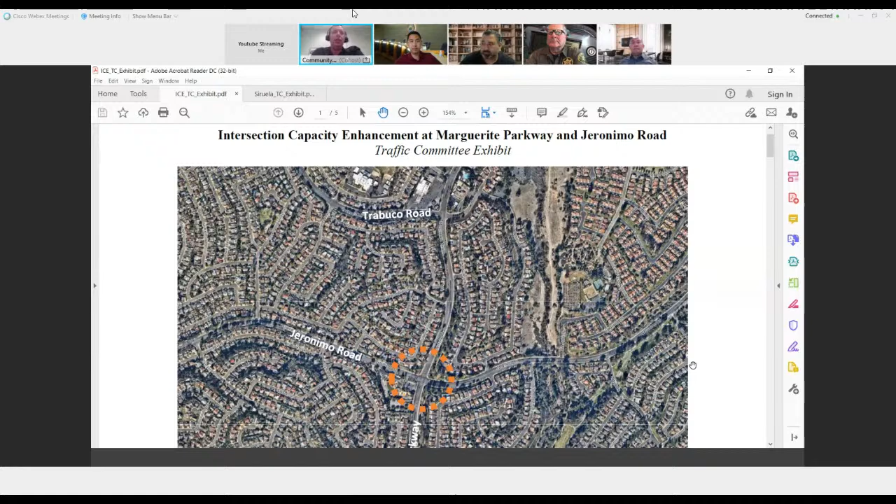And this is going to allow us to add some additional lanes here to handle the traffic flow at this location. So real quick, let's just go over the summary of the changes that are going to be made at this intersection.

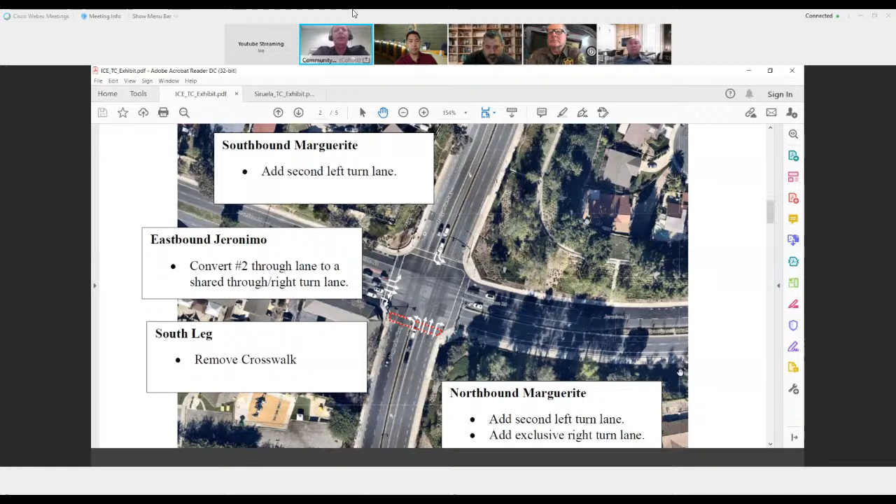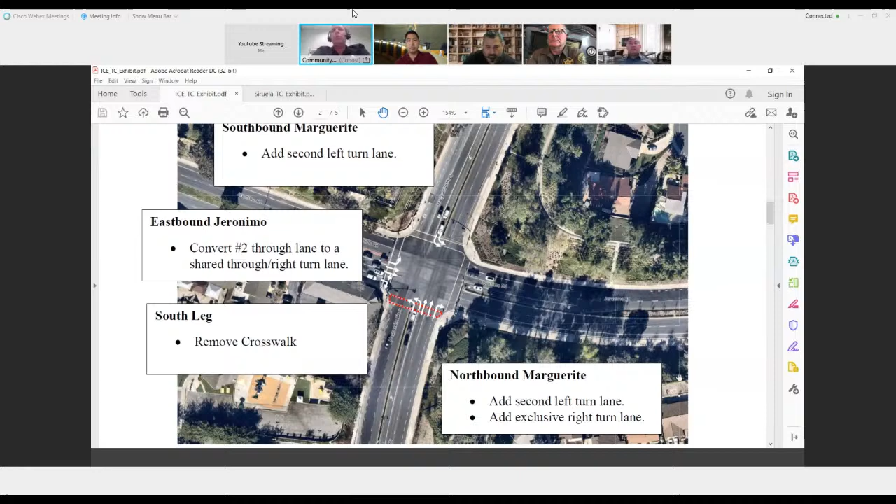So on the southbound direction, we will be adding a second left turn lane. In the eastbound direction, we will be converting the number 2 through lane to a shared through and right turn lane. On the south leg of the intersection, you'll see in the red dotted area, we are proposing to remove the crosswalk on that leg of the intersection. And then finally on northbound Marguerite, we're going to be adding a second left turn lane and an exclusive right turn lane.

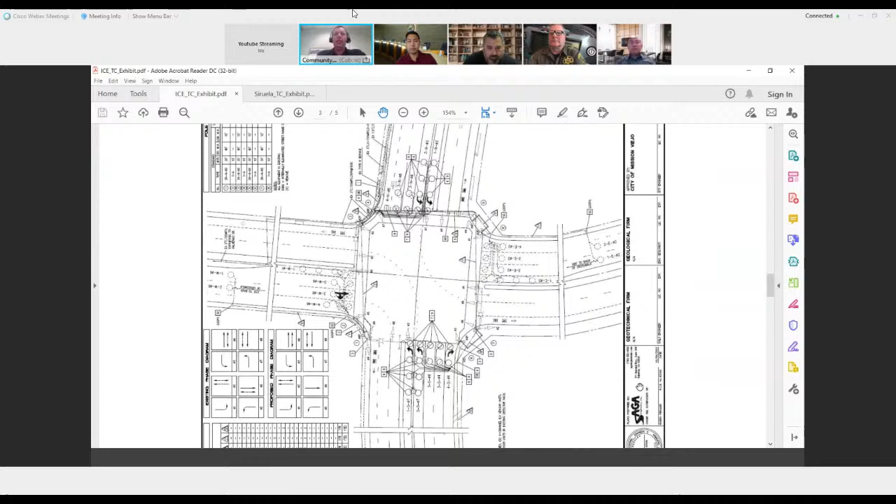So that's the scope of the work that's going to be completed out there. And the next exhibit we have shows what the proposed project will look like when it's constructed. So you can see on the northbound and southbound sides, the second left turn lanes there. And on the left side, which would be the western side of the intersection, you can see the new roadway stencils for that shared through and right turn lane in that what used to be the number 2 through lane there. And then at the bottom of the intersection, you can see that the crosswalk has been removed.

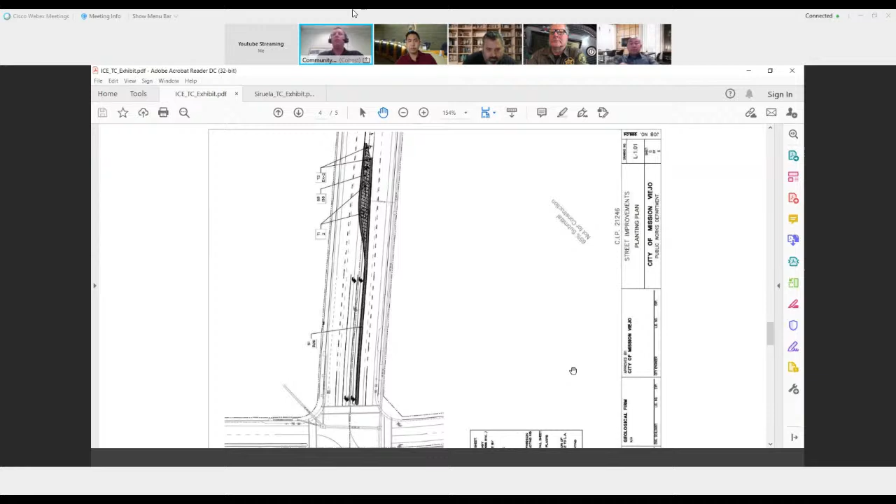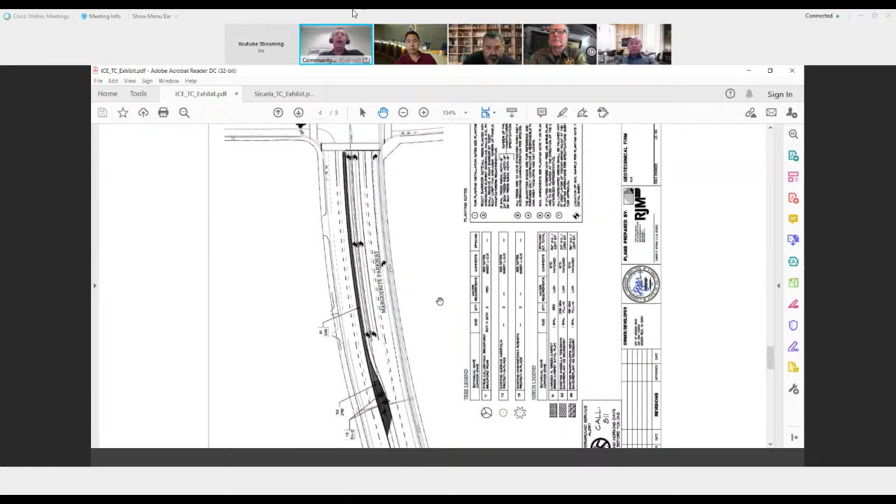And then this next exhibit shows you the plans of how we accomplish this. We're not making any changes to the footprint of the right-of-way, but these changes will be accomplished by making modifications to the center median and shifting some stuff around to make room for those extra lanes. So there's the northern leg of the intersection and the modifications that are going to happen to the median there. And then it will be doing a similar thing on the south side where you can see the modifications to the median that have to be made so that we can add the additional left turn and the exclusive right turn lane.

Now, the reason we're doing this, I have an exhibit here to show what the justification is for making these changes. And so here the arrows are a little bit tiny, but we'll go through them in the table below, showing the existing traffic volumes at this location to justify why we're adding the second left turn lanes or the exclusive right. So we can review those numbers now.

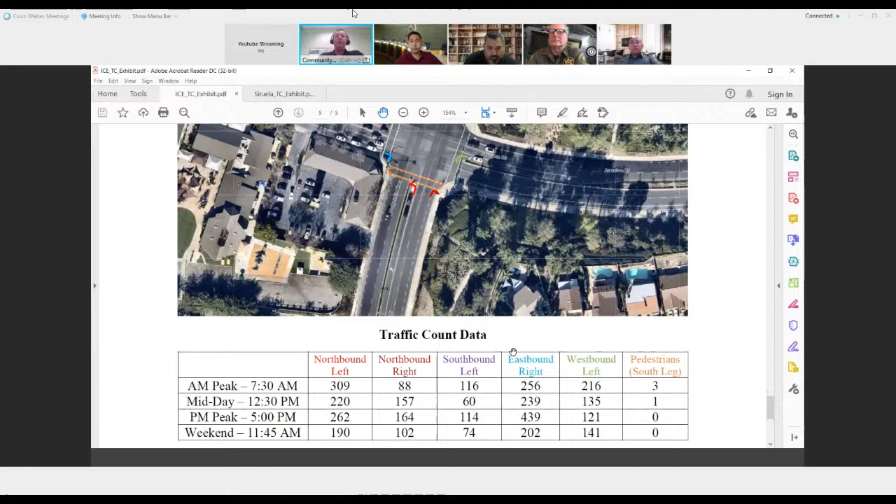So starting with the northbound direction, we have our 4 different peak periods we look at: the AM peak, the midday peak, the PM peak, and then there's the weekend that we have to consider. And these are basically tied to this traffic signal coordination patterns that we have running out there. So those would match up with these timeframes, and the patterns would be adjusted to best service these traffic volumes.

So the northbound left turn, we have traffic volumes that range from 190 vehicles per hour up to 309. A typical left turn lane like this would handle about 250 vehicles per hour. So on the weekends it's functioning adequately, but the midday peak is getting really close, and the AM peak and PM peak it's operating above capacity. So that's the justification for the extra northbound left turn lane.

The northbound right also gets some fairly heavy traffic, mostly in the midday and PM peak periods, where it's 150 to over 160 vehicles per hour.

So the southbound left turn lane isn't quite as impacted as the northbound direction. Our peak hour traffic volumes there range from 60 to 116 vehicles per hour. But I believe the extra southbound left turn lane is included because of the offset we have to make for the medians changing to make room for the northbound left turn lanes. We could either have a second southbound left turn lane or just a shaded-out gap between the turn lane and the through lanes, and we figured if we're going to do that, we might as well have the second southbound left turn lane.

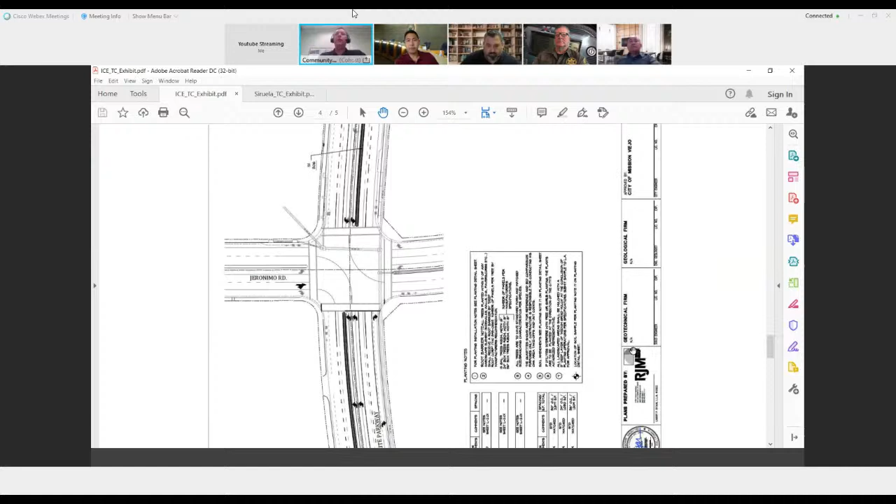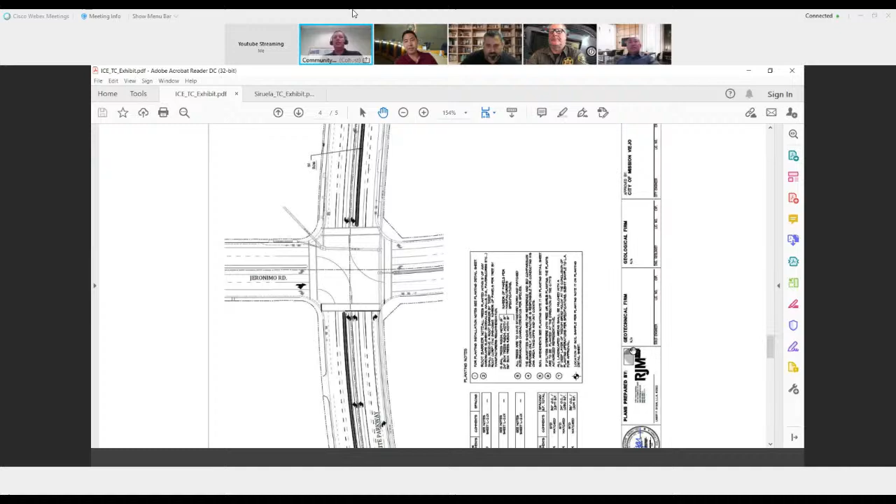So our role here is just to review this information, and then it'll be passed along to the city council, correct? That is correct. And when we do the process with city council, there are signs that get posted at the intersection for that crosswalk, and that will give the opportunity to take public comment on the removal. I see, okay, so we don't have to make any decisions that would prevent this from going forward to the city council. I mean, not that I plan to, but I just wanted to clarify our role. Yeah, the role of the traffic committee is to say that you reviewed the traffic volumes in the chart here at the bottom, which shows a low volume of pedestrians on that crossing, and so you would be moving it forward to city council for them to take their review.

Okay, while we've got it in front of us, what is the estimated time for completing this if it's approved by the city council?

That's a good question. The project is managed out of our engineering department. Our assistant engineer, Joe Ames, will manage the construction. But we have to go through this step before he can even begin construction. The process requires design first, which we're wrapping up—we're at the final stages of design. Then we have to go out to bid, and the winning contractor will start on the project immediately thereafter. I'd say it would start before the end of this calendar year, and probably take six to twelve months to complete.

So from today, maybe we're looking at a year, maybe next summer, by that time it'll be fully completed. But as far as starting the actual construction in the intersection and completing that, we don't know yet an estimate until it goes to bid. Correct. We have to first hire a contractor, and once we award the construction contract, we can meet with them. Depending on their availability, they will start the construction portion of the project.

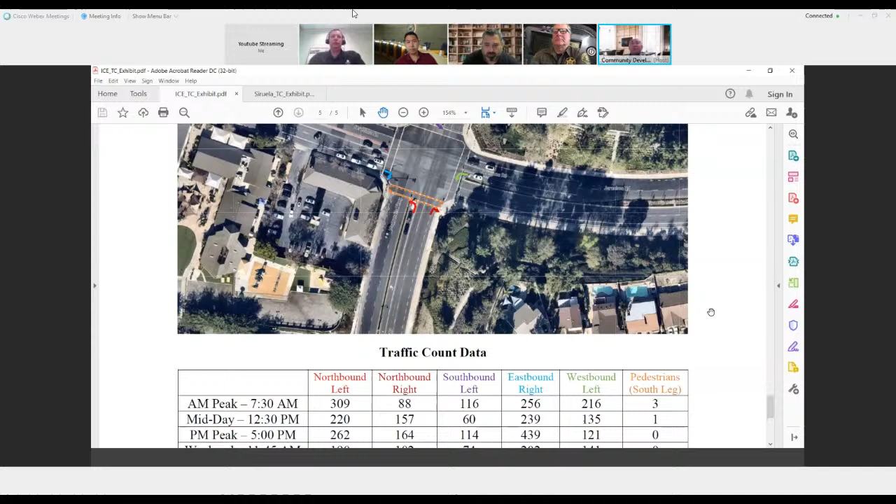But when we did the pedestrian volume count, you can see on this table in the far right column—fairly, there were only three people in the morning, one at noon, and then nobody in the afternoon and nobody on the weekend. So we're inconveniencing about four pedestrians crossing here. One corner does have commercial retail, so that's an attractive corner, but they have a parking lot there, so if you're driving to that location, you'd go to that corner. The only challenge is if you're walking or biking to that location and coming from the southerly leg crosswalk. That would be the only challenge, but our data shows it's not utilized very heavily, so we felt comfortable removing it.

Gotcha, okay, thank you very much. You answered my question, appreciate it. Right.

I recall a long time ago this concept of level of service of an intersection. Is that applicable here? And if so, does this improve the level of service of this intersection from what it currently is, which I'm not sure what it is now?

Yes, I'm gonna take this one, Brett. Yes, it helps. It helps a lot. I believe today we were just right at acceptable level of service, which was a level of service C.

This intersection, I don't know if you guys drive by it often, but the northbound left turn lane, the queue is so long that it spills into the through lane. So when you're driving up Marguerite, you see cars stacked in this left turn lane and spilling into your through lane, so you have to either go to the next lane over or stop. That's really what prompted these improvements.

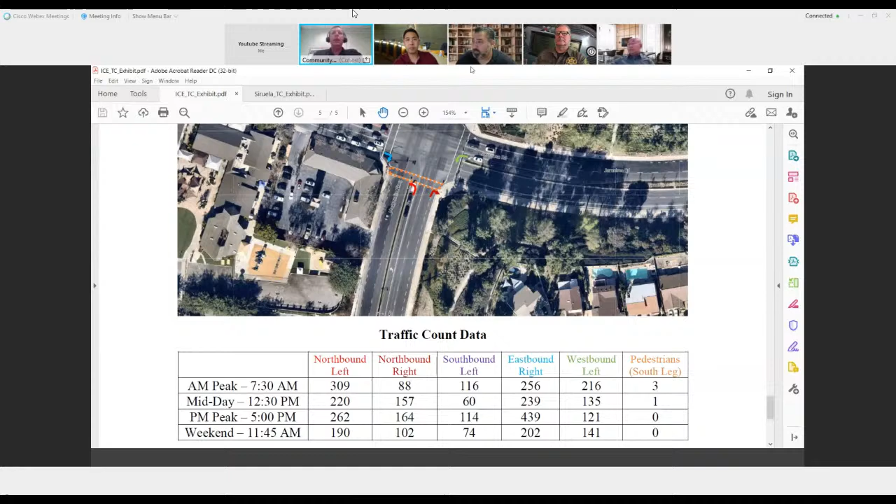All right, that will finish up this item, and so I can stop sharing my screen. That'll move us on to item number 3, which is a request for an accessible parking space at 27286 Jardines. Philip will be providing the staff report for that item.

We are at the property address of 27286 Jardines, in the southern end of town, on the northeast corner of Marguerite and Crown Valley Parkway. If you're heading east on Jeronimo past Marguerite, there's a traffic signal at Jardines. You go into the Jardines tract, almost all the way to the end, near the cul-de-sac. That's where the property address is.

This portion of Jardines has a 25-mile-per-hour speed limit. We don't have any traffic volumes and there are 0 reported collisions. This request was for an on-street accessible parking space directly in front of the resident's home. They would like an accessible parking space constructed on the street in front of their single-family detached home.

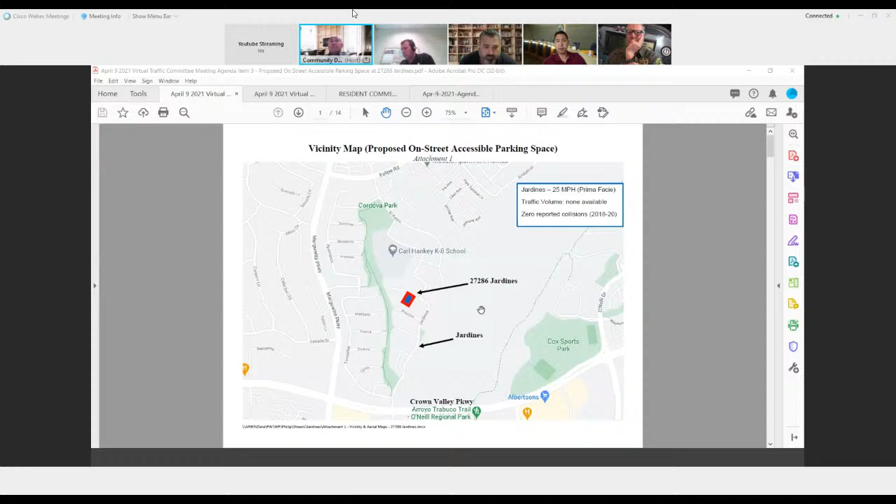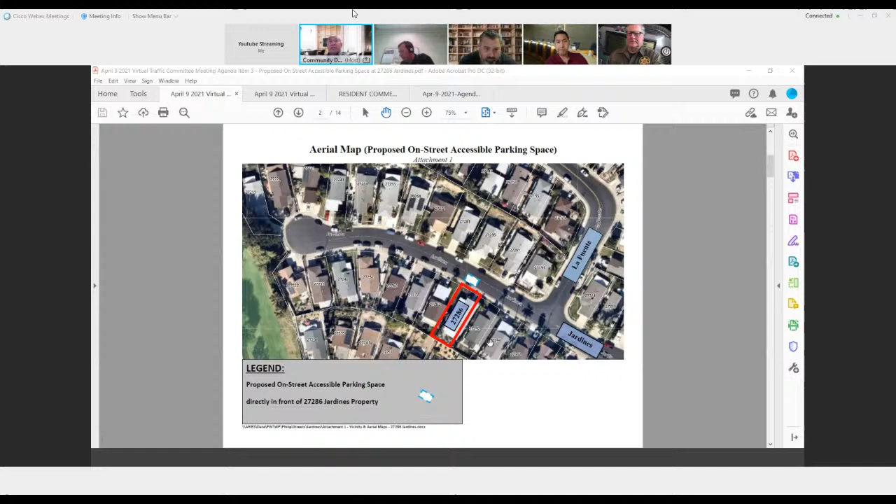I'll read their original request in a couple of exhibits. Here is the aerial view of the cul-de-sac on Jardines. The property address is 27286. There's a proposed on-street accessible parking space, so I put a little white box there with a blue perimeter where it's supposed to go, and I highlighted the house with a red box.

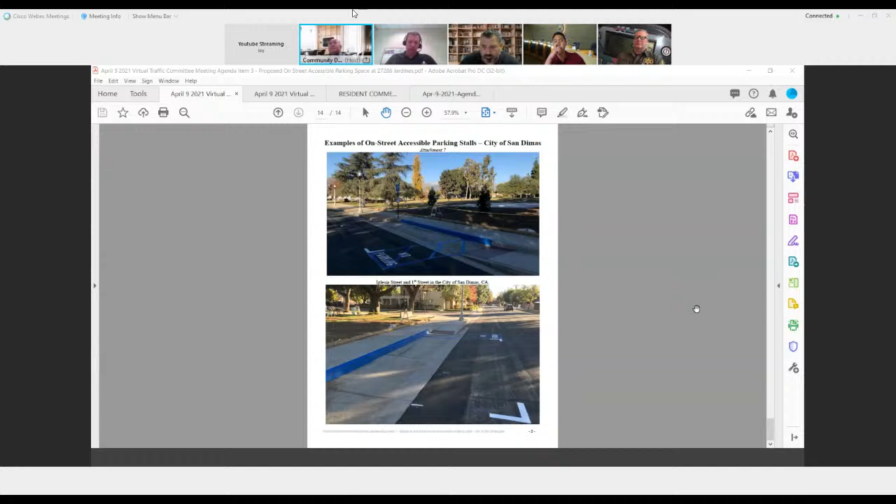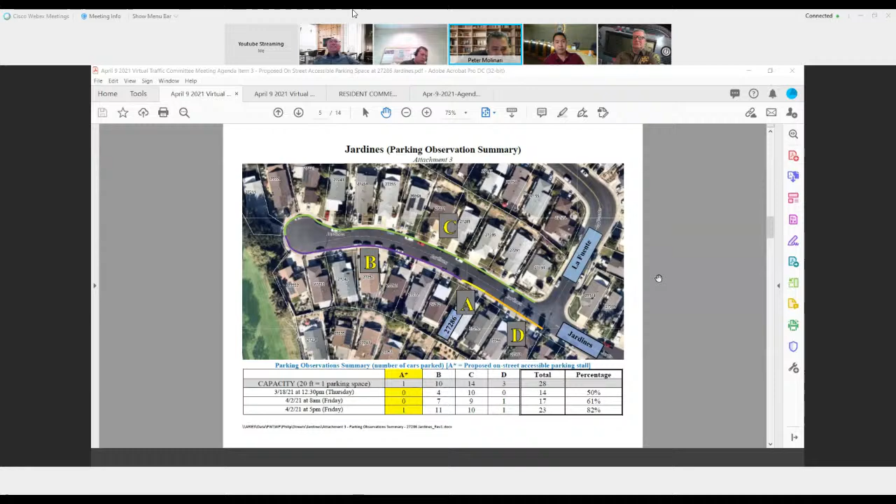Well, there's 2 parts to your question, so I'll try to answer. First, there were 2 designs. This first design is called the conventional design from Caltrans. It pushes the sidewalk in 5 feet, so you're correct, it would wipe out the existing sidewalk. But we have to maintain the sidewalk because we have sidewalk in the public right of way, so we would create a new sidewalk pushed in about 5 feet.

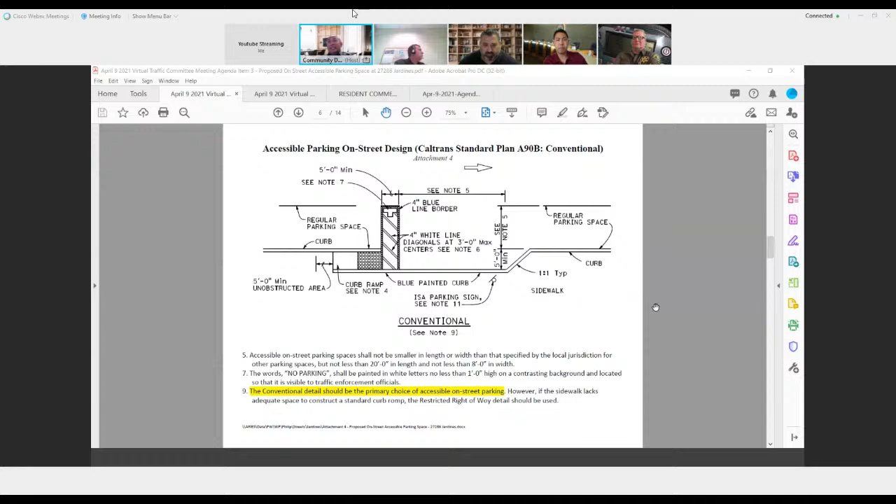Now, the city only has the right of way 8 feet back from the curb, and the sidewalk is 5 feet. So you push it in 5 feet, and you need another 5 feet for a sidewalk, so now we're exceeding our right of way. We would have to encroach about 2 feet, maybe more like 5 feet, into the resident's yard, because the existing sidewalk is 5 feet wide. We need 5 feet for the loading landing area, plus another 5 feet to keep the existing sidewalk. So that's the option for the conventional design.

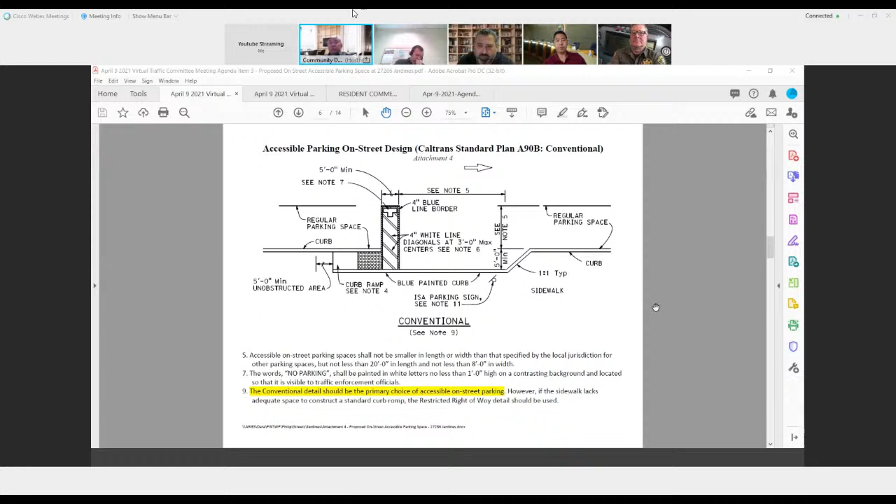If we do the restricted right-of-way design, this is a last resort, we would not encroach into the sidewalk. We would just do the pavement markings, and then put a sign next to the pavement marking for the accessible design. That's the second part of the question.

Gotcha, okay, that answers my question. Thank you very much, appreciate it. Sure.

Just to clarify, our role in this agenda item: are we approving the installation of accessible parking, or are we approving putting in place a process for him to further request this to be done? Given the draft resolution, it seemed like we're just sort of doing the latter.

You're correct, it would be the latter. First, we don't have any accessible parking anywhere in the city in the public right of way, so in order to construct one, the very first one in the entire city, we have to establish a program, and in order to establish a program, we have to complete a resolution. So your role would be, if you feel comfortable moving forward, to recommend that resolution be forwarded to the planning commission for approval.

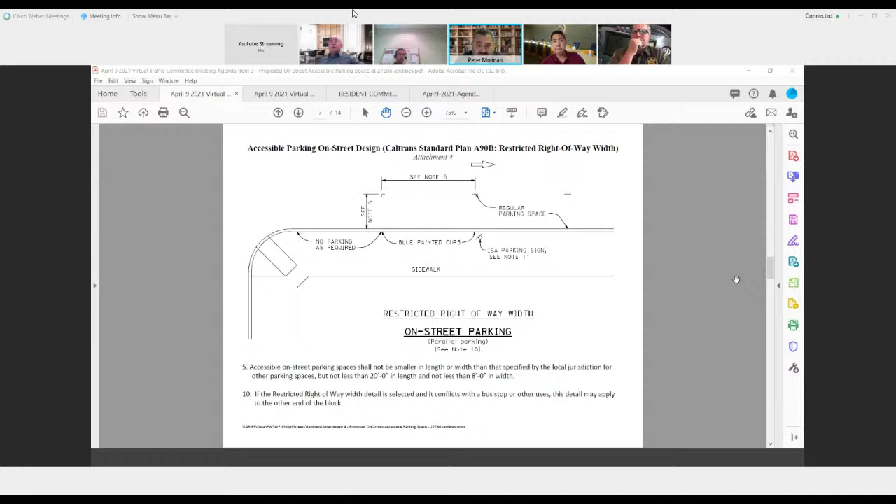Okay, and I would agree with Commissioner Quino, just for future, to have a process in place to start that with the commission itself, take a look at it, because while this is one of the first times someone's asked, having a process and guidelines in place will help steer applicants into the correct process. So that's my thoughts.

I just wanted to check with other staff if they have any questions or comments. Deputy Dixon or Brett, you guys have any questions or comments? No questions from me.

I think this is going to be a problem down the road if we start going in and taking the public right of way away. Not to say I don't know how many disabled citizens live in Mission Viejo or anything like that, but we start taking away these parking spots that are provided for the general public to use on their streets. We get a request in, and this starts that process, and one day we end up with 50% of a public street that has 50% of those spots out in front of houses now restricted to disabled parking.

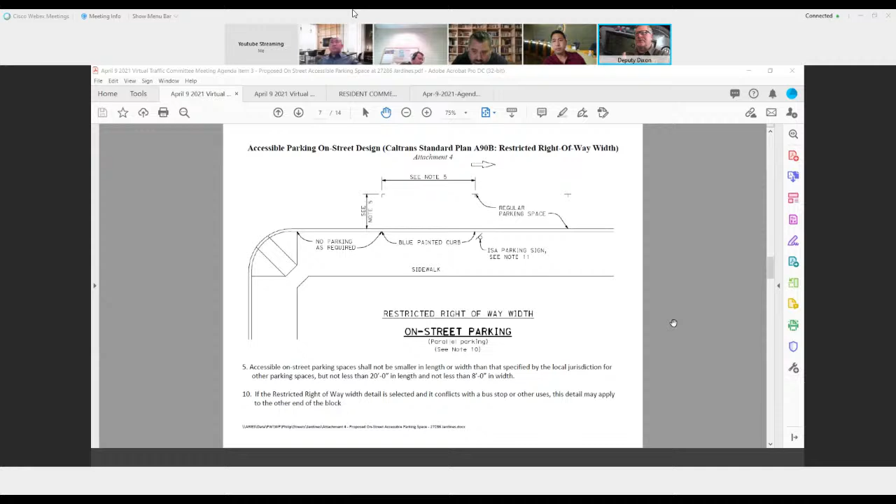Now we've taken away 50% of the parking that other people in that neighborhood may use, and I just think it's going to create a lot of problems. I think also that this space is going to be in front of this gentleman's house, it's not going to prevent somebody else who also has a disability from being able to pull in and park in that spot. What kind of a neighborhood issue is that going to create between the residents in that neighborhood? I think there's just a lot of issues we look at when we talk about parking in general.

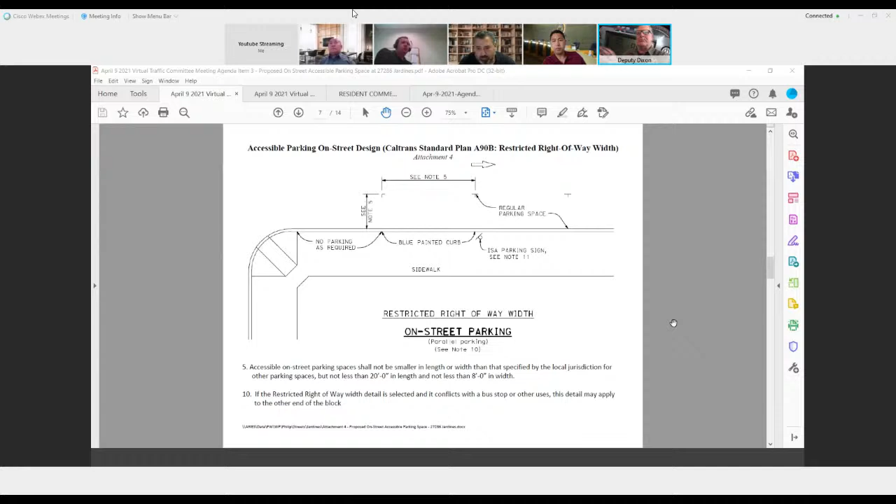And therefore they're taking that city property and putting it out in front of businesses, where it's not going to create that community issue or neighborhood issue or whatnot. It's just providing that additional parking to meet requirements through the ADA.

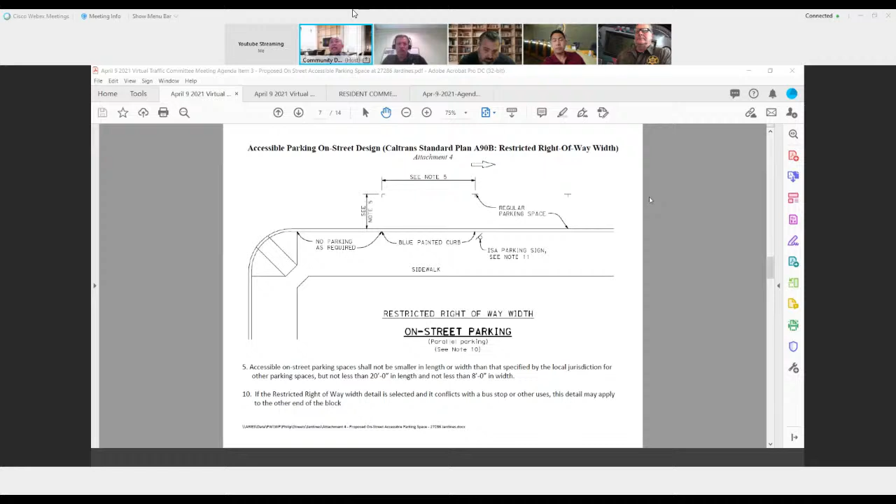Okay, thank you for your comments, Deputy Dixon. I just want to affirm that you're correct - if we proceed forward with the construction of an accessible parking space there, that means anyone with an accessible placard can park there, not just the resident that lives there. So anyone can park there.

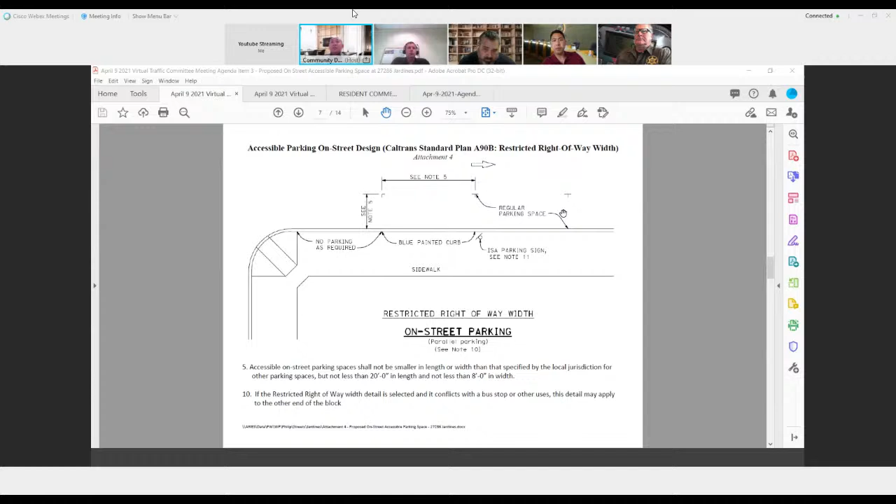In regards to having too many accessible parking spaces on the street, I guess the city of Milpitas did account for that. On the draft resolution I created - oh, you know, I guess I didn't include it. Actually, there's one in number 6: they did indicate that if you decide to construct an ADA space, there should be no other existing ADA space within 500 feet of that proposed location. Apparently they were getting a lot of applications next to each other, and that's why they added that condition. So that's basically my comments.

I have a question. Historically, how many requests like this have come in to the city, say in the past 5-10 years? Good question. I've been at the city for 12 years, this is my 13th year. I've had 2 other requests.

My other request was from Hillcrest. It was an issue inside the HOA property. We notified the HOA of the meeting and they showed up during the traffic committee meeting. The resident asking eventually talked to the HOA, and they said they would resolve it internally within their parking spaces. We also looked at a similar scenario where the ADA would require a 5-foot loading area, which would cause the sidewalk to be pushed in along Hillcrest about 5 feet. The traffic committee at that time did not want to proceed with that design because it would be a fairly large financial impact. So that was the first request.

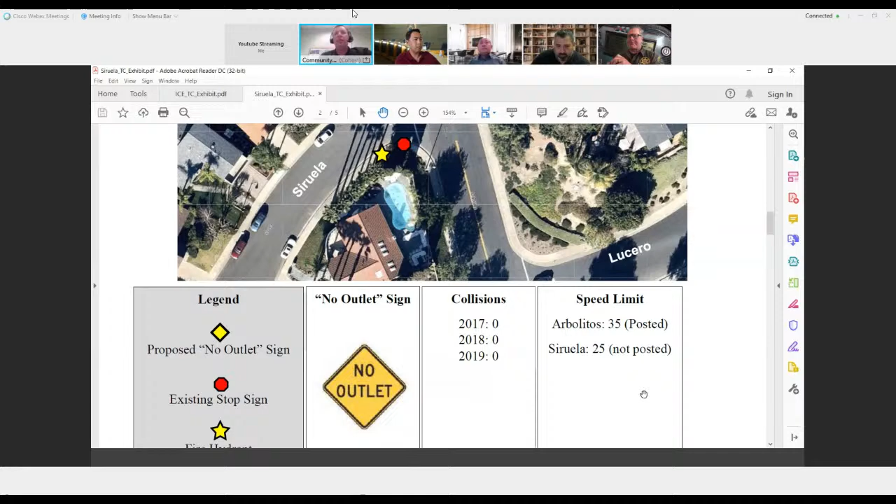We also have the speed limits. On Arbolitos, that is considered a collector street, so it's a higher volume, higher speed street than a local residential street, and it has a posted speed limit of 35 miles an hour based on the speed survey that was conducted out there. On Siruela, the speed limit would be 25 miles an hour because it is a local residential street. However, it is not posted.

So if it's the committee's decision to have this sign installed, staff would recommend doing some additional outreach to that particular resident to get feedback before dropping a rather large street sign in their front yard.

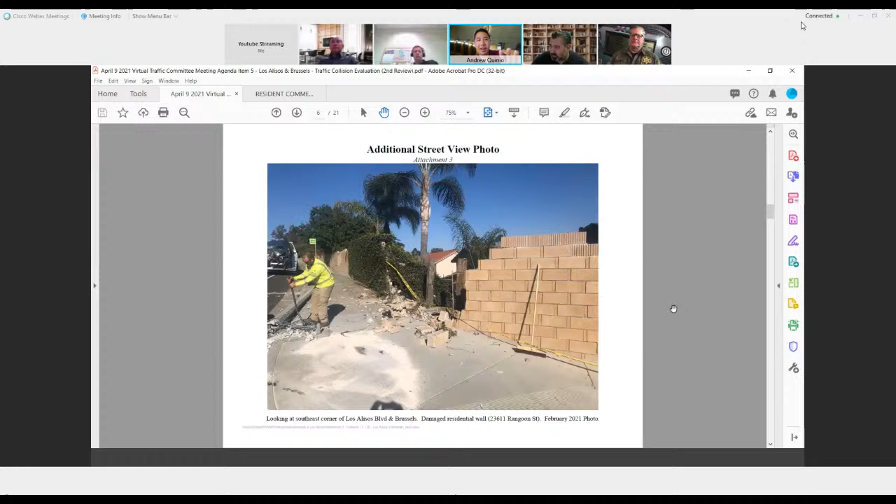Yeah, what I had in mind is just some cooperative, informal or formal discussion with the property owners to think outside of what we're able to do. But yeah, I recognize it's private property. As far as the Chevron signs, would it be helpful if those had blinking lights on them too, in addition to being reflective? Is that something we could consider, and do you think it would be helpful?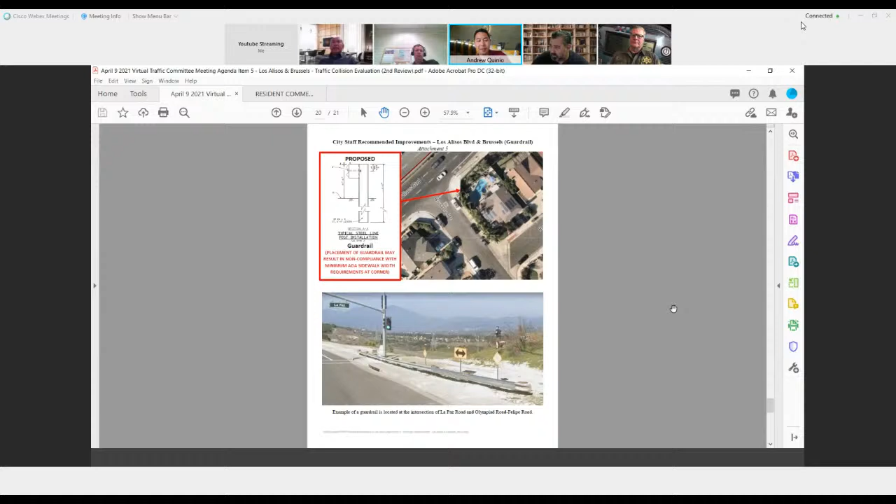Are you referring to these signs? Yeah. I think there are manufacturers out there that have blinking signage they can manufacture. I think the sign by itself is bright enough - it does have retro reflectivity. We'd have to look into that. I don't believe we've customized any signs to have blinking lights. The only blinking lights we have are beacons, to warn a motorist that a traffic signal is up ahead - we have a couple of those in our city. But the one you're talking about, we'd have to research to see if they can do a custom one for the chevron signs. If that's the route you want to go, I don't know what that would require.

How do they, if they're blinking, that would require electricity. So I don't know if that means they'd get that from an electrical outlet somewhere, or if they're doing it with solar, and what does that entail? Is there additional boxes to convert that solar energy into electricity? Those are the questions you'd have to address if we were to go that route.

And just preliminarily, based on your expertise, would that add any additional benefit, or is it superfluous given what's already reflective? I think it brings more attention, and in the right application, it's useful. These particular signs, yellow is the best color you can see in daytime or nighttime, so I don't know if blinking lights on a traditional sign are needed. As they are today, they have a retroreflective background, so they shine the light back and you can see them fairly bright from a good distance before approaching. So it does attract driver attention without the blinking lights. We don't have any blinking lights in the city, so that would be a first - we'd have to research the requirements for adding blinking lights to an existing approved sign.

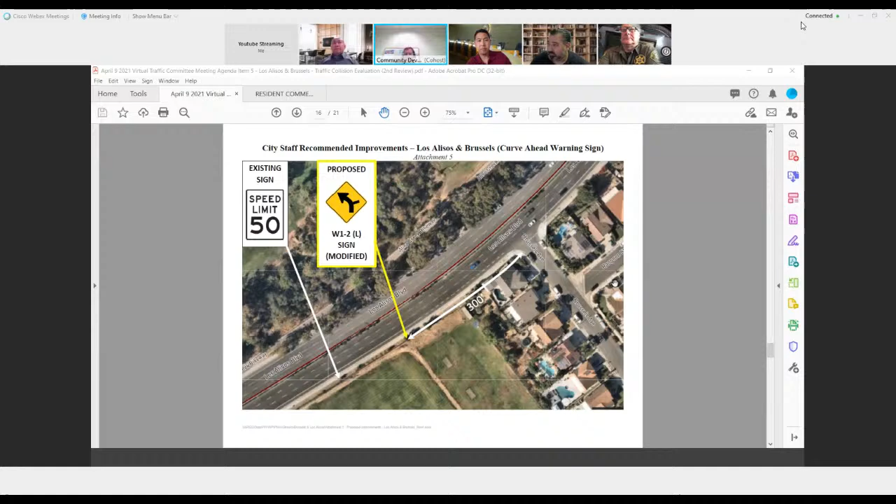Brett, were you able to record all of that? Yeah, I have that. The committee is directing us to install the modified curve warning sign, the chevron signs, the N-type markers, and raised pavement markers on the approach to the intersection.

One last comment, if I may. For the residents that made their comments and expressed their concerns, I want to make it very clear that I'm very sensitive to the problems there and what they're trying to express to us. Quite frankly, I would have been in favor of the bollards, but we have an obligation to the ADA that we can't dispose of, and that's ultimately why I approached it the way I did. But I completely understand where they're coming from, and I recognize the problem and how frightening it is given the history. That's all I wanted to say.

All right, that concludes this item. I'm going to stop sharing my screen and let Brett move to the next agenda item.

The next agenda item is the last one, and it's one of the simpler ones: this is the updates portion of the traffic committee meeting. If there are any ongoing city projects or questions for city staff, or an item you'd like the traffic committee to consider at a future meeting, this is the time to bring it up. We can open the floor to anyone with questions or comments.